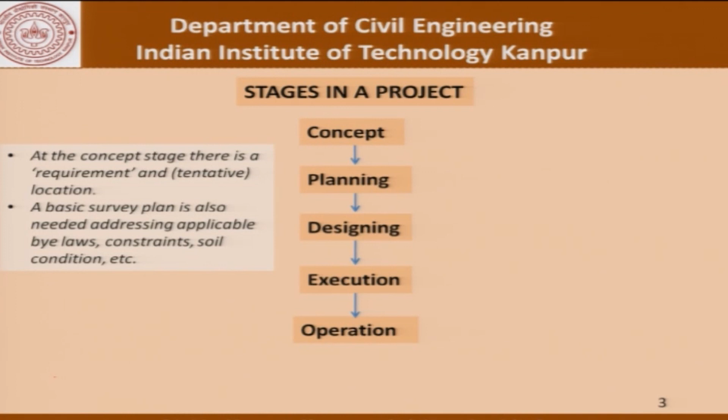So, from the concept we move to a more detailed plan, followed by structural and other design steps. These design steps are followed by an execution phase, where a contractor or another agency actually carries out that project, followed by the operation of that project, during which we are mostly concerned with the maintenance and operation of that, and finally the decommissioning. So, as far as this particular course is concerned, I have already emphasized that we are primarily dealing with these aspects, from concept to planning to design and execution. More specifically, we will deal with design and execution as we go along.

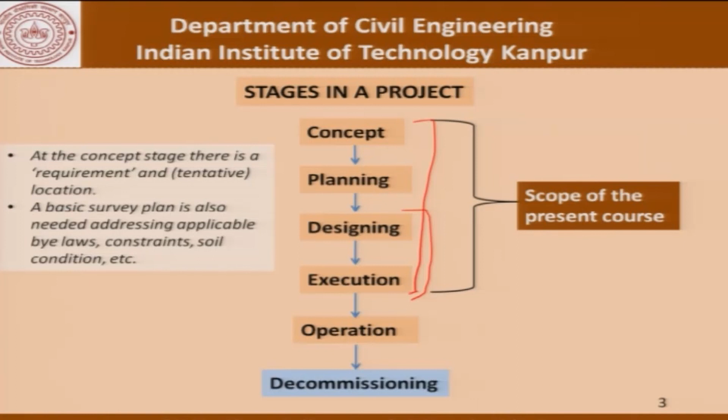Now, before we get into that discussion, in this lecture today, we will go through some of the major steps in the execution of a project and also cover some of the basic definitions that we will use as we go along in this course. Now, coming to the first step, which is the concept. From there we move on to the preliminary estimate of the project. This exercise the client or the owner carries out to have some understanding of how much, as a ballpark figure, the project would cost, whether it is going to cost 1 million or 10 million or 100 million and so on.

We must remember that we are not dealing with individual finances, we are dealing with institutional finances which require approvals, which require the proper kind of paperwork supporting a particular expenditure. So, here is a preliminary estimate which need not be very accurate, but if it is accurate it is good. Please also remember that even to prepare a preliminary estimate, the client has to invest a certain amount of manpower. There is a certain amount of investment in terms of manpower, in terms of resources to prepare the preliminary estimate, and that is what we talked about earlier in this discussion today. That is the investment that is required to do the very rough layout plan, figure out the need and so on.

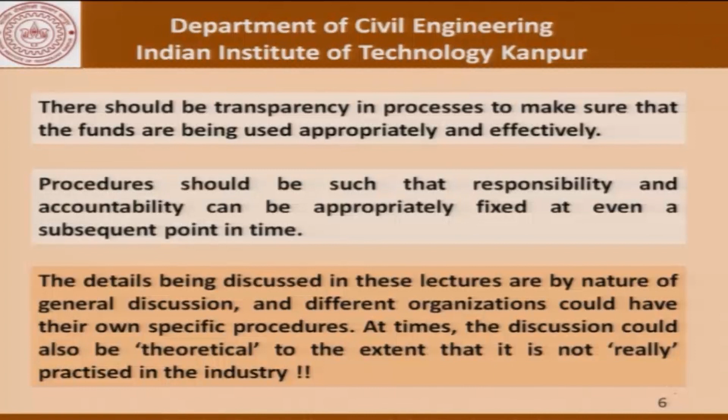I must also share with you the fact that the details being discussed in these lectures are by nature a general discussion, and different organizations could have their own specific procedures and their terminologies. At times, the discussion here could be largely theoretical to the extent that it is not really practiced in the industry. We will talk of processes which could be ideal.

We may allude to them in that form or not, but we must remember that it is not a single process which is practiced across the construction industry. Different organizations, whether it is the railways or whether it is the roads, they have their own processes. Different countries have their own processes by which these projects are executed. Now, having said that, let us look at a few simple definitions.

What exactly is a tender in the construction industry? This really is a written offer to execute a specified work within a certain time under certain conditions of contract between the contractor and the client for a certain amount of money. So, we have a client and we have a contractor, and what binds them together is a contract.

And this contract basically says that the contractor agrees to create a certain service or a certain structure or whatever it is, and the client agrees to compensate the contractor with a certain amount of money. So, now this pair is what is given in the contract.

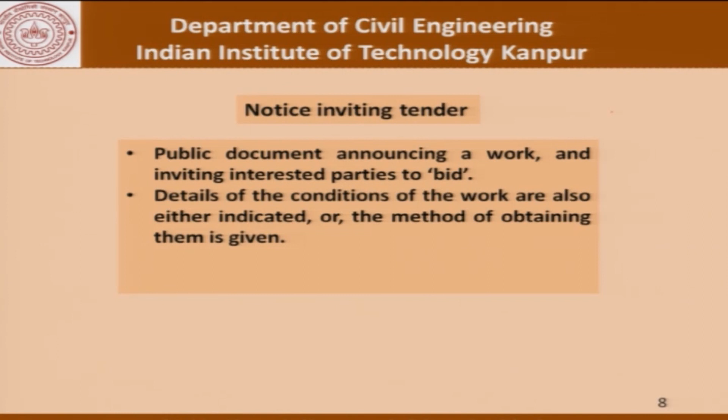As we saw in a previous slide, this is the stage when the client is ready to go public with an announcement that, well, this is a project which we would like to see executed. So, a notice inviting tender is a public document announcing a work and inviting interested parties to submit their bids. The details of the conditions of the work are also either indicated or the method of obtaining them is given.

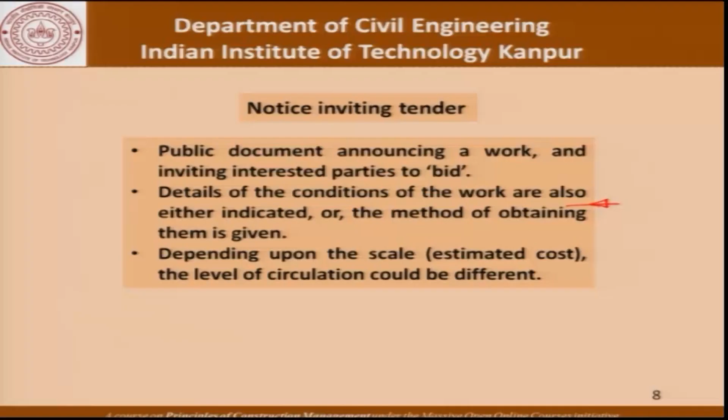So, this is where we really need to have completed all our detailed design and everything, so that any interested bidder can either look at that document, or there is a place, it could be a website, it could be a link or whatever it is, he could go there and obtain the details of the work and the conditions under which it has to be carried out. Then, depending upon the scale or the estimated cost, the level of circulation could be different.

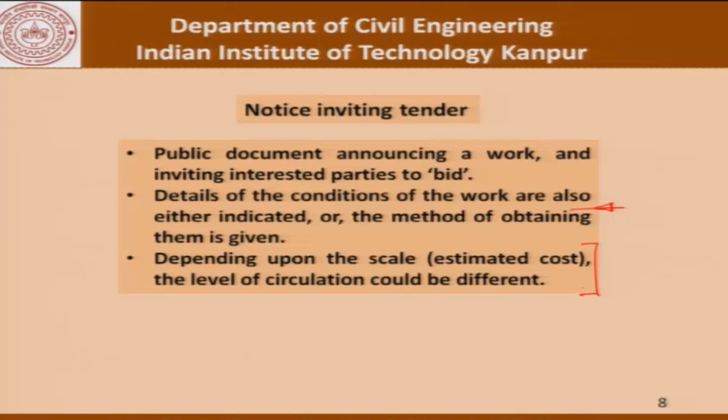Now, what this means is that depending on the estimated cost of the tender or estimated cost of the work, and that estimated cost is not the preliminary estimate, it is basically based on the detailed estimate, that is the final estimate that we worked out at the end of our planning and design exercise. Based on that cost, what should be the level of circulation?

The level of circulation means whether we should publish it locally at the client's website and leave it at that, or we should make extra efforts to publicize the fact that there is a work available. The lowest form of circulation is word of mouth. We just inform some people and let it be. The most public form of circulation is a global tender, where we try to invite people from across the world to bid for a project.

We must remember that circulation also involves funds, and therefore one has to decide that, okay, for a 1 million project, this is the level of circulation that we will do. For a 10 million project, this is what we will do, and for 100 million, this is what we will do, and so on. So that is where different departments, different institutions, different organizations may have their own standards and methods of circulation.

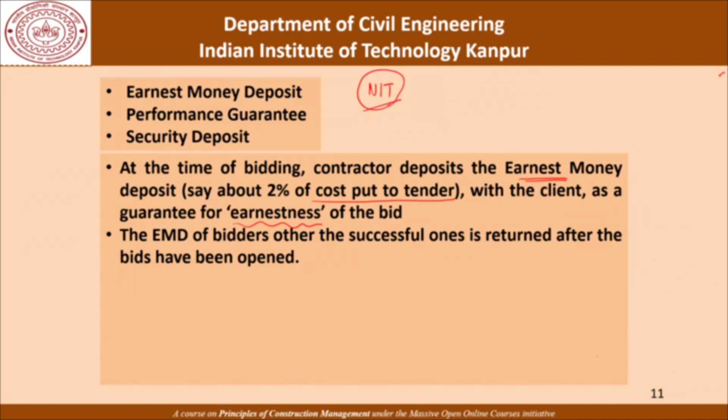The EMD of the bidders, other than the successful ones, is returned after the bid has been opened. Obviously, there can be more than one bidder and only one will be successful. There may be conditions in which you may like to keep another bidder on your waiting list or something, provided that is allowed by the conditions that you are operating under. Now, if that is the case, at least for the others who are not successful, who are not in the race for doing that project, their EMD needs to be returned after the project bids have been opened.

Now, as far as the forfeiture is concerned, it's also possible that the EMD may be forfeited by the client, that is, it is not paid back to the bidder under the condition that the bidder wants to withdraw the bid after opening of the bid. Now, that may happen even for a successful bidder. The guy may be the lowest bidder or whatever it is and decides not to pursue that bid. In that case, at least the EMD will be forfeited or may be forfeited.

One must understand that in processing the bids, the client puts in a certain amount of resources. It costs the client a certain amount of money to process the bids. Now, if all the EMD is to be returned, then it becomes a completely losing proposition, and not that the client wants to make money out of it, but at least as a deterrence for people trying to get a project and getting out of it, the provision is there for forfeiture of the EMD. For the successful bidder, there is an LOI. Now, what is an LOI? Letter of intent.

The client issues a letter of intent and asks the successful bidder to furnish a performance guarantee, now related to the actual amount of the award, because earlier we were talking of cost put to tender since nothing else was available. But after the bids have been opened, the client knows the cost at which this bidder has bid.

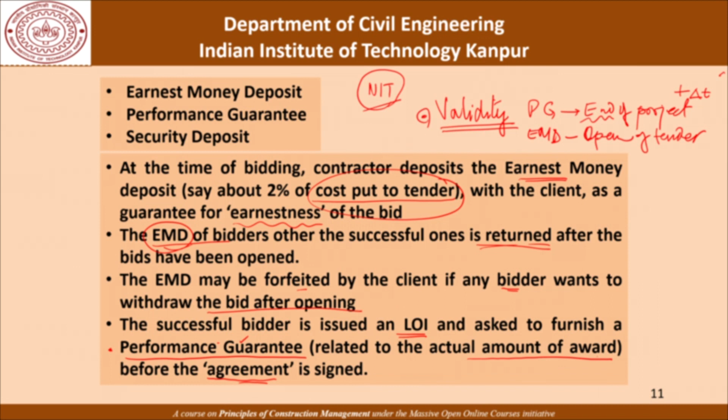Whereas the performance guarantee needs to be valid till at least the end of the project - not exactly the end, but end of the project plus a small time beyond that, say 3 months or 6 months. So, keeping the validity in mind, the bidder might furnish a fresh performance guarantee altogether, or might extend the validity of his EMD and furnish performance guarantee for the balance funds.

Recapitulating this - the letter of intent and performance guarantee. Through the NIT, the client has identified the agency to whom the work is to be awarded and issues a letter of intent, LOI, asking that bidder to deposit a performance guarantee, which could be 5% of the award value, and mobilize and commence work. The date of commencement is defined in the LOI, and once these conditions are met, we go to the signing of the agreement. This agreement then becomes the Bible as far as the contractor and the client are concerned in proceeding with the works.

This performance guarantee is released after the issue of the completion certificate by the client, if the performance in terms of time, safety, etc. during execution is found satisfactory. So why do we need a performance guarantee? At least as far as this definition is concerned, it's not in terms of the performance of the project that will be constructed - it is in terms of the performance of the contractor.

So the contractor, by depositing the performance guarantee with the client, basically makes a statement that here are some funds available with you, against the possibility of the contractor not doing the job satisfactorily. So obviously the performance guarantee is not required once the project has been completed. Once the project has been completed and the completion certificate has been issued by the client, this performance guarantee can be returned to the bidder.

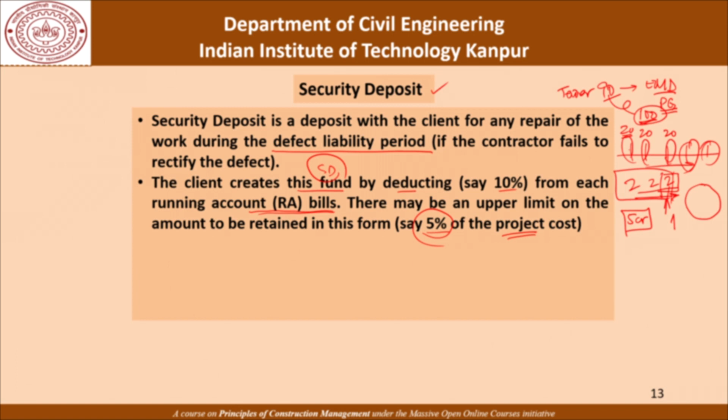Now one may have a cap on this amount. For example, if I say it's 5% of the project cost, then instead of 2 here, this will become only 1, and no deductions need be made here, because at this point the 5 crore limit has already been reached. Now these are all operational details which are well laid out in contract documents, and I am giving you only an illustrative example.

So it's easy to understand now that at any point during the project, the client has access to the performance guarantee, which is already available with him, coming from here, and a certain amount of the security deposit.

At the end of the project, when the performance guarantee is to be returned to the contractor - I am not using the word bidder here, because at this point the bidder has become the contractor, having completed that project - the performance guarantee has to be released, and only the security deposit is then retained till the end of the defect liability period. And that's what's written here.

The security deposit is refunded after the defect liability period has lapsed and no defect is pending for rectification. So how much should be the defect liability period, whether it should be 3 months or 6 months or 1 year, is an open question, and we'll talk about it several times in this course.

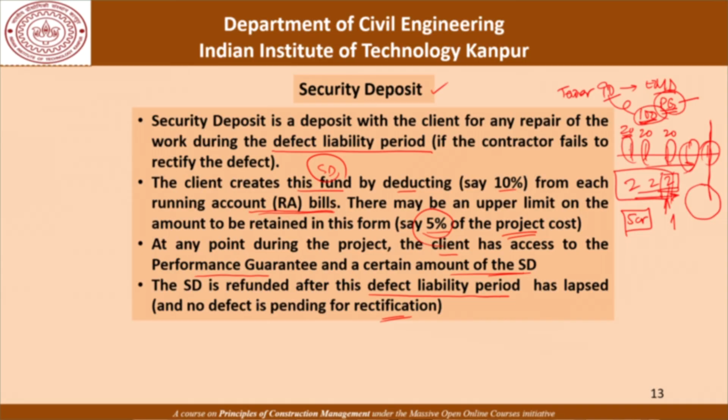Now let me talk a little bit about the evaluation of bids and identification of a contractor. The bids may be evaluated on the basis of lowest cost alone. So at the end of it, here is a project, 5 people bid for it, and depending on whosoever is the lowest bidder, we award the job to that person and issue him what is called the letter of intent.

That is what we were talking about in the last slide. Having said that, though we can award the job to the bidder with the lowest bid, we must make sure that the bidder is technically competent, financially sound, and so on. This has to be ensured through an examination of technical competence, financial soundness, safety record, and so on. All this is part of the evaluation process that goes on.

Of course, we can award the job to the bidder with the lowest bid, but we must make sure that the person is technically competent, financially sound, has the right kind of safety record, and so on. So all this has to be a part of the evaluation process.

Now either we do that on a case to case basis for each of the contracts that we award, or it can be done through a process of empanelment. This empanelment is exactly the kind of thing we referred to earlier, that the client invites bidders to submit their documents, so that for a period of time, that is the validity of the empanelment, different bidders submit documents which establish their competence.

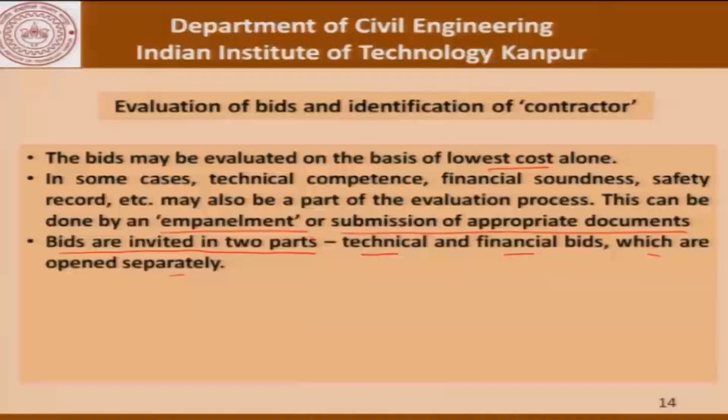The technical bid does not contain any financial details, and obviously that gives only information about the technical competence. It could include financial soundness and everything, other than how much it is going to cost for that particular project, or how much money the bidder is going to take from the client for that project. So once we have this so-called 2 bid system, initially we carry out the technical evaluation, and then having carried out the technical evaluation, we open the financial bids.

Typically technical bids are opened first, and after a certain amount of time, the financial bids are opened. Financial bids are usually opened only for bidders which qualify technically. It makes no sense to even know the bid of a bidder who lacks the technical competence, so those bids are summarily returned and rejected. Only those bidders whose technical bids are found in order will have their financial bids opened.

In this process, evaluation can be based only on the cost for the technically qualified bidders, or it could be based on a composite score based on evaluation of technical and financial bids.

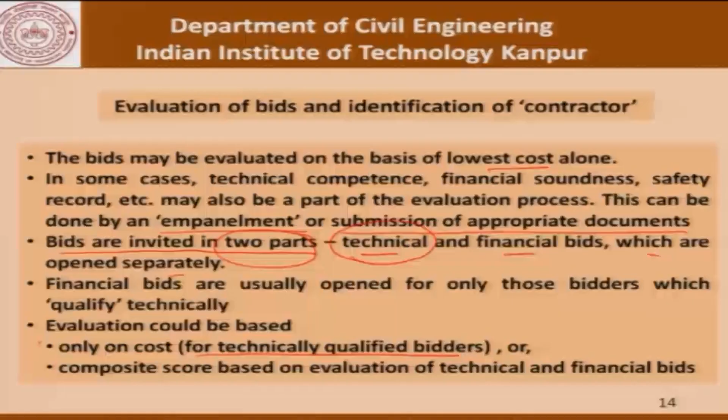In the next class, we will go through an example where this concept will be more clearly explained. For now, it suffices to say that what I call A means that for all bidders who qualify technically, it is only the cost that decides the winner, or to whom the project will be awarded. Whereas in B, that is not the case, and the score on technical competence will also have a certain weightage in the final evaluation. This will become clearer once we do an example next time.

To recapitulate, what we have done today is gone through the notice inviting tender, whatever details it should contain and so on. We have studied the evaluation of bids based on the bidding criteria. We have gone over the award of jobs, signing of contract, the issue of the LOI and so on.

Starting the construction work, before construction starts, once we ask the contractor to mobilize, we also have the provision of a mobilization advance, which the contractor can ask for in order to facilitate his mobilization. Let me quickly explain what I have written here.

We must be very careful with document verification in terms of past record, financial details and so on before we sign the contract or issue the letter of intent.

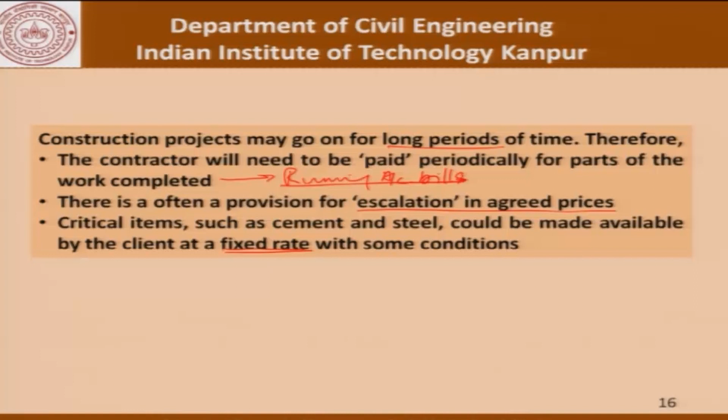Also, because of the long duration of construction projects, there is often a provision for escalation in agreed prices, and critical items such as steel or cement could be made available by the client at a fixed rate with some conditions. This kind of provision protects the contractor from fluctuations in cost of critical items. That is why the client takes that risk, and perhaps also to ensure a certain quality, that material supply is included as part of the client supply.

Finally, there are different types of contracts. It could be a lump sum contract or a turnkey contract, an item rate contract, or a build, own, operate and transfer contract, or an engineering, procurement and construction contract. As far as we are concerned, we would largely concentrate on the item rate contract in this module.

But having said that, I would like you to find out more about these types of contracts, and it will help if you have a specific simple project in mind. Think of a road from point A to point B. If this is the project being tendered for and people are bidding for it, how will these different models or types of contracts be applied to that project? That is food for thought for you, and also list some examples of each of the above contracts from information available on the internet and so on.